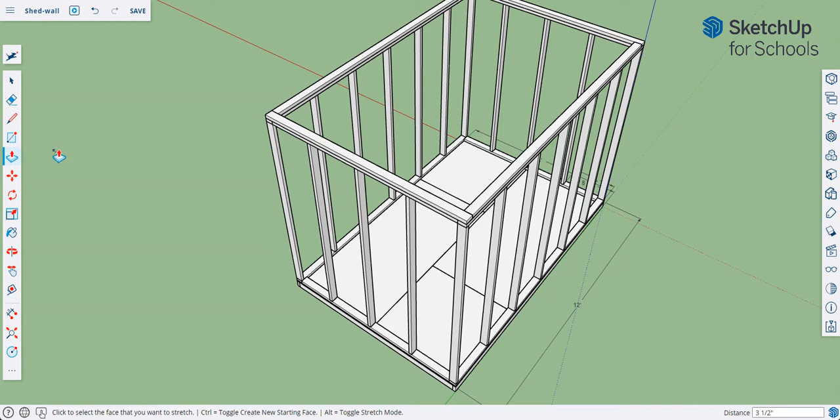For this wall frame, this is good for a shed, but if we were to cover the wall from the inside, we do need to put some blocking. That means we need to add another piece of this one here. So we can simply create a stud wall again.

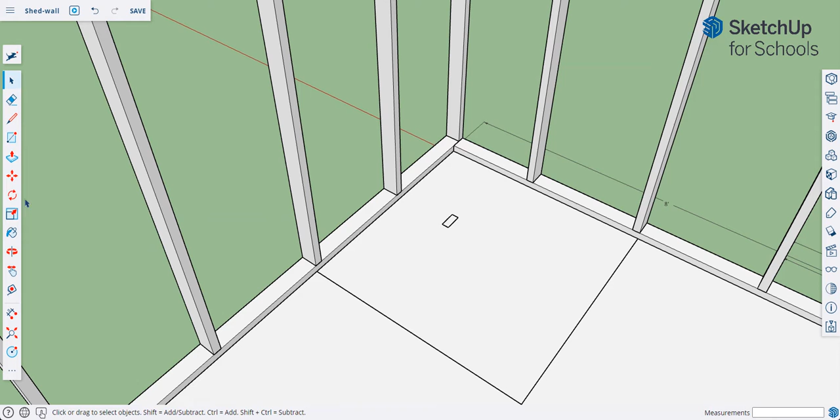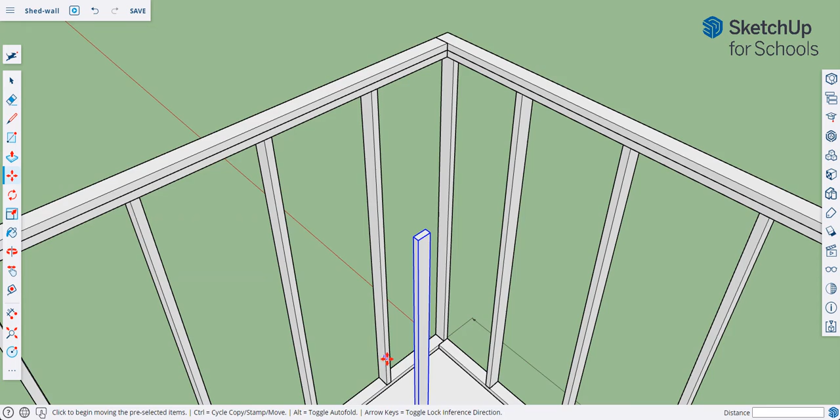Okay, 1.5 by 3.5, and then raise that up. We're going to raise it as tall as this piece, but let's move it up. Let's leave it there first, and then triple click and make it a group, not a component, but make it a group. And then we can move this bottom portion to here.

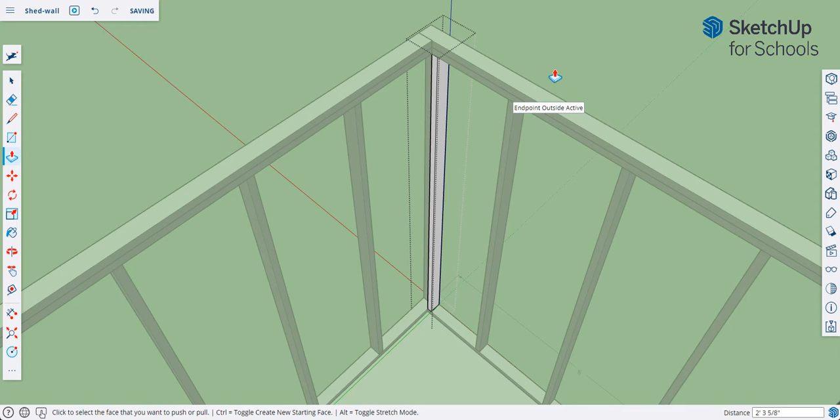Edit this group and pull this top plate until the bottom of this corner, so it's the same. And now we're going to close the group. So this one is separate from this one, okay? And so that takes care of any covering that we want to put here.

And then over here, we also need to do the same. So we're going to make a copy of this one. And we're going to put it somewhere here first, anywhere. And then rotate that.

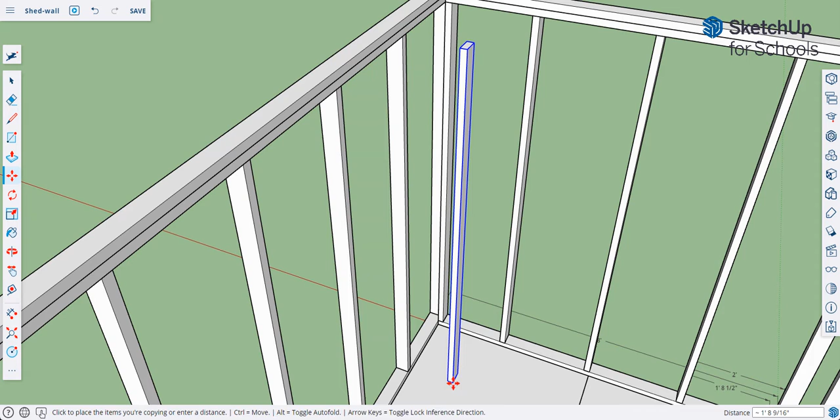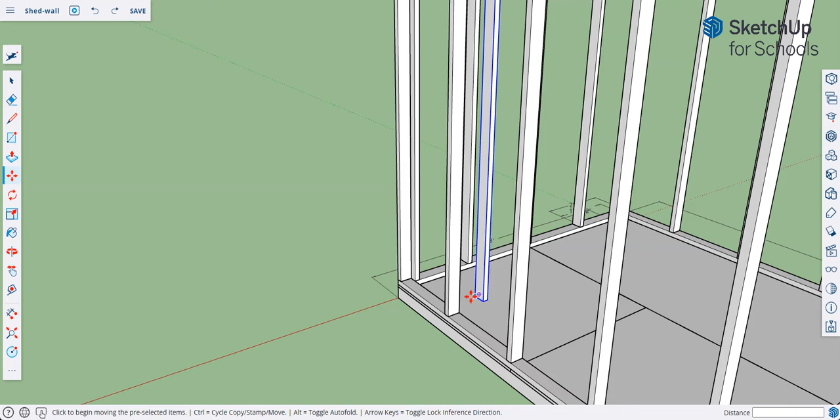Oh, no, we don't need to rotate it. Let's turn around. And we're going to move that - it's hard to see here, but we're going to move that from here. We really want to move it. You want to move this corner here to this corner here inside.

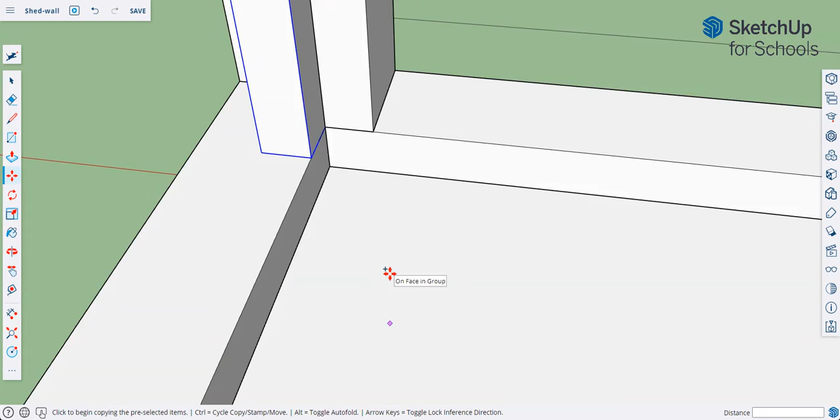There you go. Okay, and this is what we call a California corner. I don't know why they call it California corner, but it's basically a blocking so that we can attach our gypsum board or interior siding or interior plywood to this corner over here.

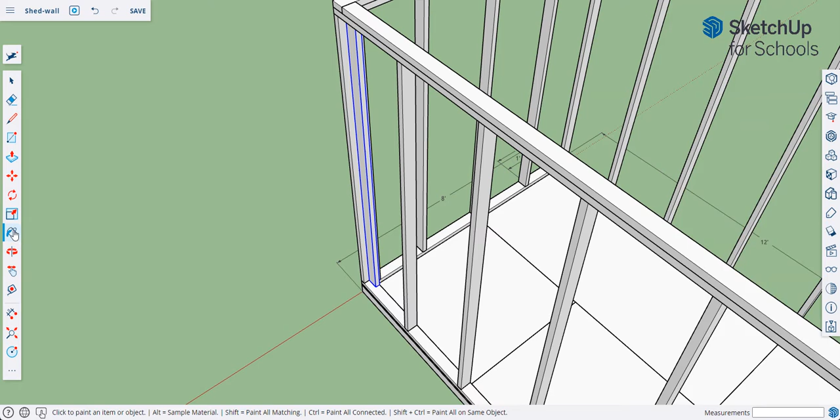And that has to happen on all four walls. Okay, so I'm going to change the color of this one and select. Let's close this. Oh, I got it, materials, and then select a color, and let's change this to wood.

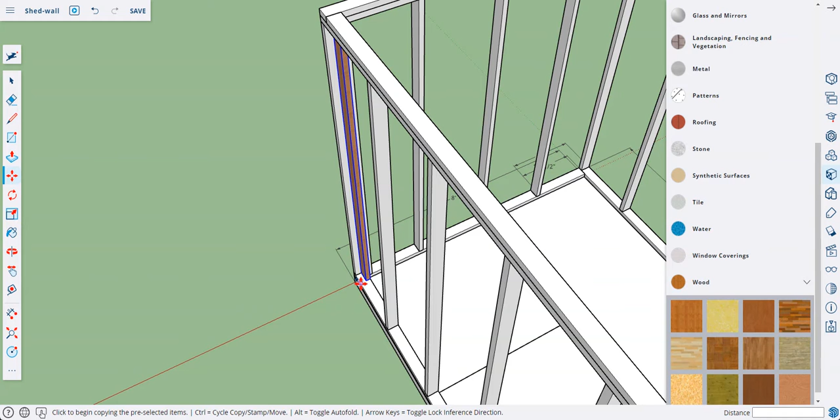When we select this wood and change that color, that is my California corner, and I want to make copies of that one. I'm going to press Control, and we're going to make copies of that corner here. And this one also, we want to make copies of this one, that corner here.

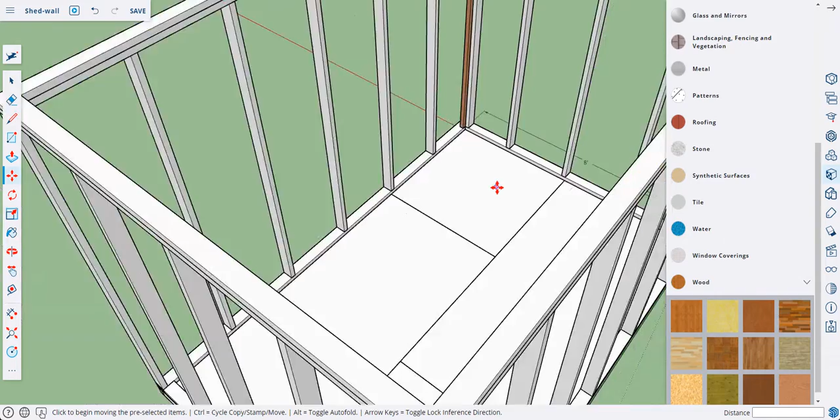And then we also want that to happen on this front end. So we're going to select this corner and that too. And instead of copying, we are going to use the mirror command.

So over here we have flip, okay, and when we flip it, we want to flip it on this middle portion over here, and we're going to press Control so it makes a copy, but we're going to drag this somewhere here in the middle, so there's the midpoint, and then it'll make a copy on this side over here. Okay, so I drag that.

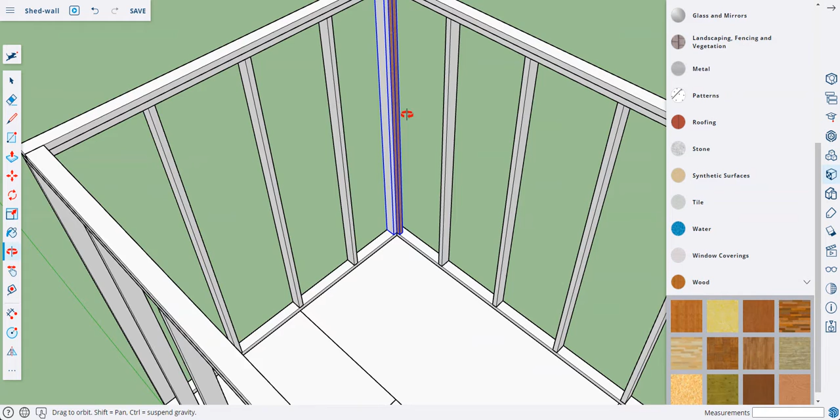So now I'm here. I'm going to make a copy of this one. So I'm going to select again these two, and I'm going to make a copy on this side. So I'm going to use my flip tool.

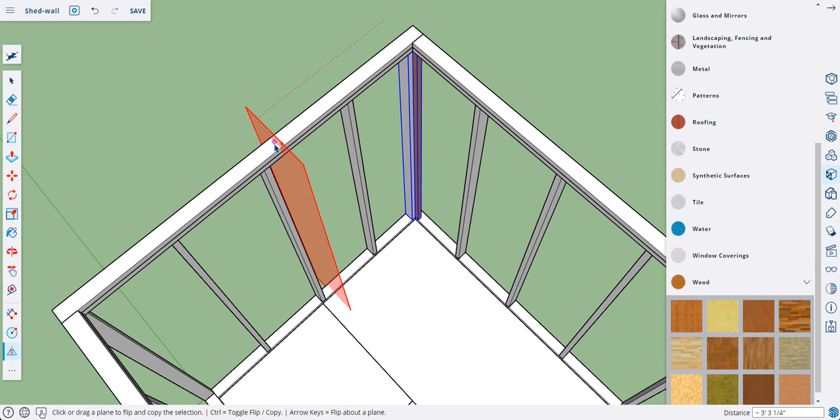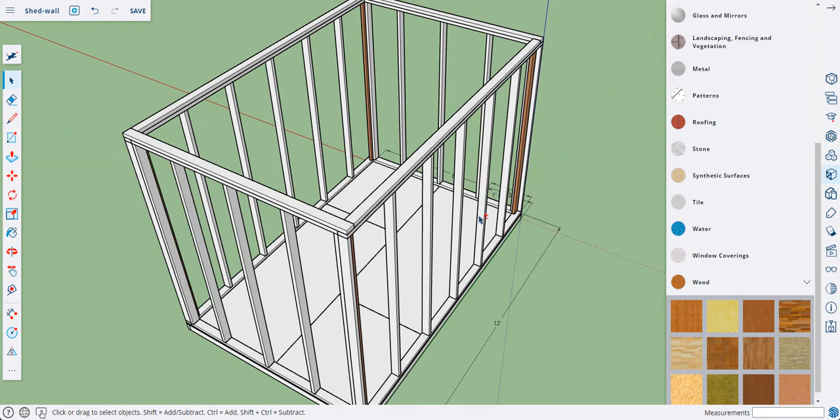I'm going to press Control so it makes a copy, a mirrored copy. I want it to mirror using the red, so I'm going to highlight the red and then drag that red and point to the middle of the wood here, and then it says midpoint, then you're going to have a copy on this side. Okay, and then simply press select tool, and now you have California corners, which we made using flip, which is also another word for mirror.